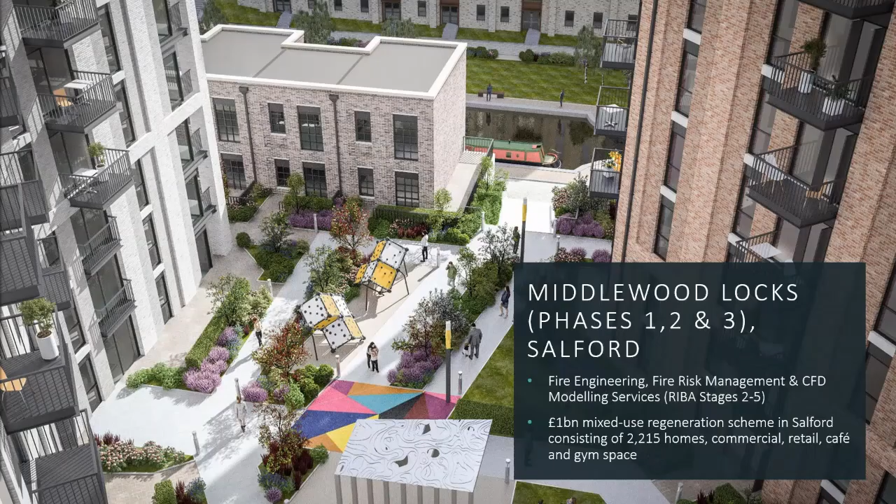Some of the work we do: Middlewood Locks. This project is a retrospective assessment of materials used in external walls on pre-existing buildings, and fire safety strategy development for ongoing design risks. Combining our fire engineers and fire risk managers, we provided a full spectrum fire engineering approach to this project.

Hunslet Road in Leeds, very dear to my heart. Our contribution stretched from site investigation to transport assessments to energy and sustainability statements. In July, the project was awarded project winner at the Housing Design Awards.

Siemens Train Factory. I often tell our clients we work on everything apart from rail. However, we are delivering a railway factory. This state-of-the-art rail facility will deliver new, lighter, more energy-efficient trains for the Piccadilly line in London Underground.

Hangar 86 is the first space in the new 517-acre site to be occupied by Dyson staff. This 100,000 square foot workspace includes a gallery, labs, and testing space.

University of West of England Engineering Building: we're delivering the state-of-the-art flagship teaching and research building. Hydrock secured planning permission and is now supporting construction through to completion.

Hydrock is providing fire engineering design for the University of Bath Institute for Advanced Automotive Propulsion Systems. This new global centre of excellence will deliver transformative research and development for automotive propulsion technologies, supporting the development of a new generation of low carbon vehicles. Our team is preparing the fire strategy for the building through to RIBA Stage 7.

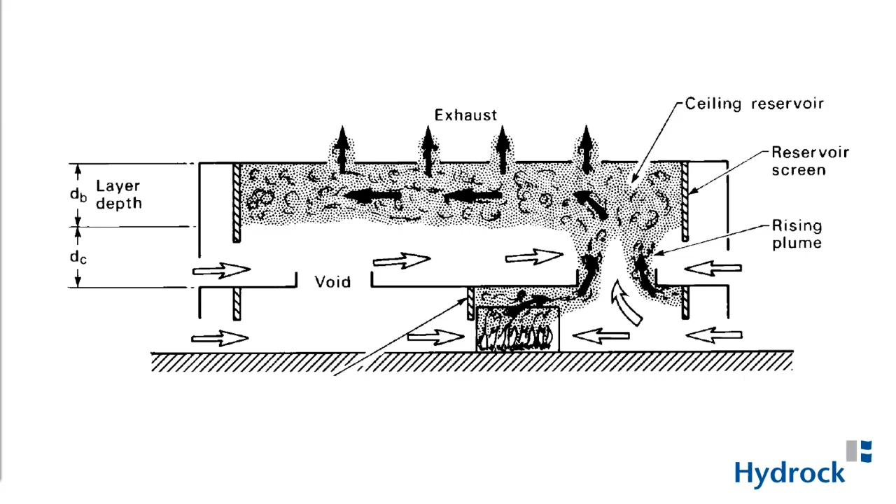Likewise, when I was living in the Middle East, the NFPA 285 test was mandated in the UAE Fire Code and the Saudi Building Code, all for new developments. I'm telling you this so you can appreciate that the impact of this disaster has been felt the world over, as the problem is the same the world over.

The Grenfell Tower fire was a disaster due to more than just combustible materials in the facade, however. The inquiry has highlighted that numerous fire doors were held open, or the closing mechanism was redundant. Fire doors have been replaced with non-tested fire doors, therefore not fire doors. Fire compartmentation had been breached with a recent gas main replacement and inadequately fire stopped. The lift did not operate as a firefighter access lift, and the smoke control system in the stair did not maintain the escape route free of smoke.

This example illustrates my previous point. If the intended design purpose of a system is not understood and appreciated, how can those who are expected to operate and maintain an adequate level of safety in a building make the right decisions?

After the Grenfell Tower fire, a panel of experts led by Dame Judith Hackitt was commissioned by the UK government. The aim was to carry out an independent review of building regulations and fire safety, and set up in July 2017. Note, the Grenfell fire happened on the 14th of June 2017. The interim report was published in December 2017 and the final report issued in May 2018, which is pretty rapid when you consider the context.

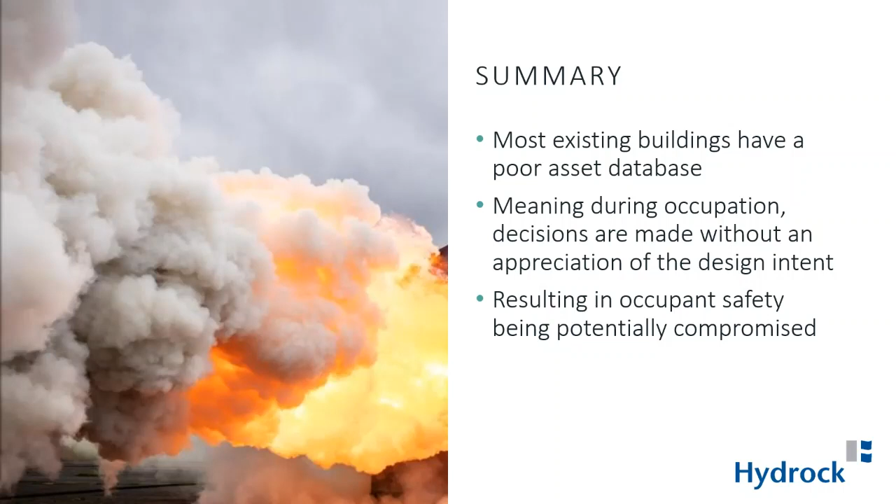Most existing buildings have a poor asset database, meaning during occupation, decisions can be made without an appreciation of the design intent, resulting in occupant safety being potentially compromised.

Under the new Building Safety Bill, there will now be an obligation to create a digital record for all high-rise residential buildings. This can be achieved by creating a golden thread of information throughout the design, build, and ongoing throughout the occupation of high-rise residential buildings.

Data will be captured during the initial design, through the build, and include any changes that occur throughout occupation. This package of building information will be used by the duty holders to demonstrate to the regulator that an adequate level of safety for the building can be maintained throughout its life cycle.

A draft Building Safety Bill was published in July 2020, which went before a parliamentary committee in August 2020. Here it was scrutinised by the Housing, Communities and Local Government Select Committee. The revised bill was published in February 21, and the Building Safety Act is anticipated 21-22 to be implemented in 2023. There's an expectation that a transition period will take place up to and including 2024.

Fundamental to the reforms being proposed by the Building Safety Bill is the way that the design, build and occupation of high-rise residential buildings will be regulated. The Health and Safety Executive has established a building safety regulator in England, headed up by Peter Baker, as Chief Inspector of Buildings. The Building Safety Regulator will have three main functions: overseeing the safety and performance of buildings, helping and encouraging the built environment industry and building control professionals to improve their competence, and leading implementation of the new regulatory framework for high-rise residential buildings.

The accountable person can be an individual, a partnership, or corporate body. However, there must be a nominated individual so that accountability can be held. The key duties that the accountable person holds under Section 84 of the Building Safety Bill: a requirement to register the building with the Building Safety Regulator. Before occupation, apply for a building assurance certificate, which must be displayed, and the building assurance certificate is expected to have the name of the accountable person and the building safety manager listed.

Appoint a building safety manager. Assessment of the building safety risks and management of the building safety risks. Create and operate a building safety case and create a building safety case report, which is expected to be every 5 years for submission to the building regulator. And also operate a resident engagement strategy. The focus of this talk is the golden thread. So we will be taking a look at how the accountable person can assess and manage building safety risk.

To make the application for the building assurance certificate, it's expected that the accountable person will need to issue the golden thread or the building safety case to the building safety regulator. After they have registered the building with the building safety regulator, the accountable person will need to provide information that as yet is not clearly defined.

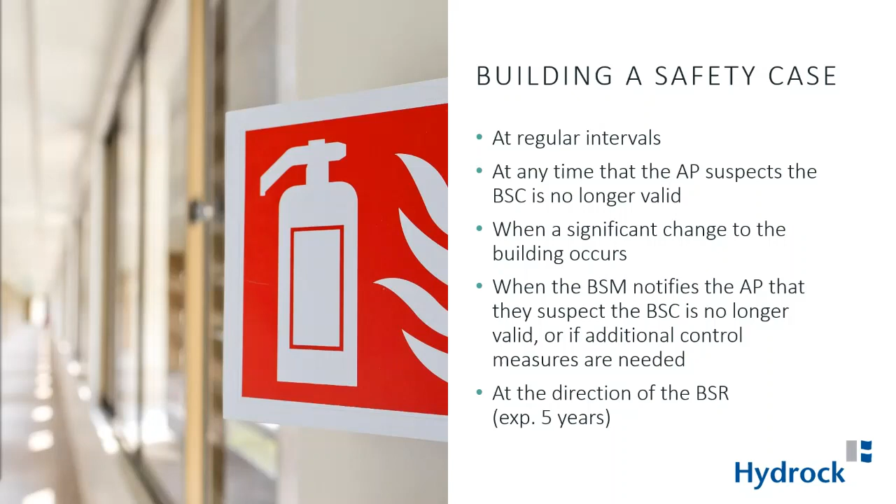The accountable person and their building safety manager will be responsible for assessing the building safety risks at regular intervals, at any time the accountable person suspects that the safety case is no longer valid, when a significant change to the building occurs, when the building safety manager notifies the accountable person that they suspect the safety case is no longer valid, or if additional control measures are needed, and at the direction of the building safety regulator. And again, that's expected every 5 years.

So fundamental to our understanding of the golden thread is the duty holder tasked with operating and maintaining the building safety case, the building safety manager. The building safety manager role will be multifaceted. Building safety extends much beyond fire safety. Structural safety, gas safety, mechanical, electrical, plumbing safety, Legionella, health and safety will all need to be overseen by the building safety manager. Meaning the role will, certainly in its infancy, be an oversight role, looking after the appointment of experts who will be delivering the safety reviews.

The building safety regulator will expect that the building safety case will be operated and maintained by the accountable person, who will then delegate to the building safety manager. Again, operated and maintained, as the building safety case will be a live document that will be continually updated as the building operates.

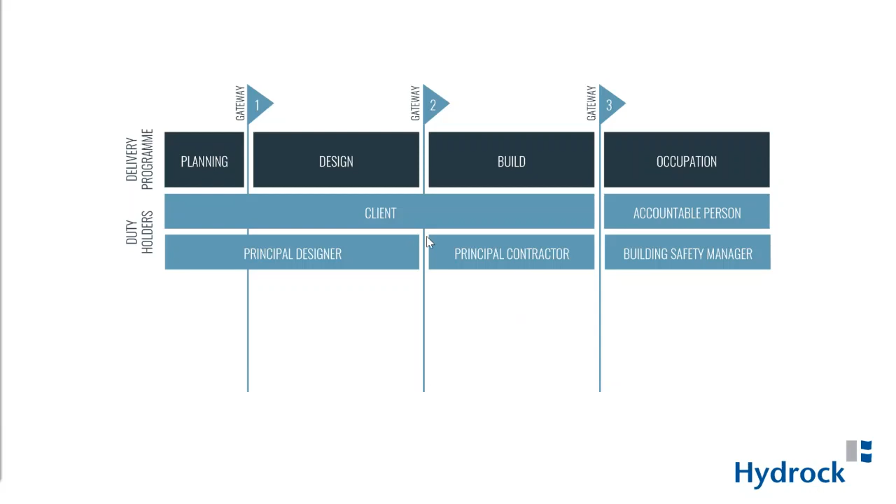Working in collaboration with our esteemed colleagues in the BIM Academy, we have taken a reverse view on what data will ultimately be required by the accountable person throughout the golden thread. Now that we have an appreciation of what will be needed by the building safety manager to operate and maintain a building safety case, we can identify what information will need to be captured through the design stage and the build stage.

Gateway 1. At this early stage, the content that the accountable person will need during occupation and in what format that asset information model operates will be defined by setting the brief. Key to this will be what information in what format will be expected to be collected during concept, scheme and detailed design stages. A suitably competent team will need to be appointed to collect this data, and an equally competent team will need to sit client side to validate this collection.

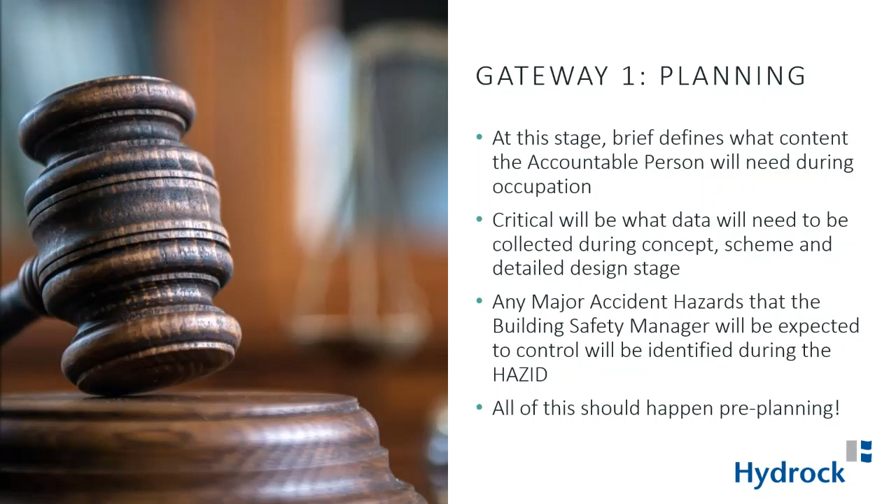The major accident hazards that the building safety manager will be expected to control will need to be identified during a HAZ-ID. All this should happen pre-planning, before the design has progressed, so that the principles for data capture can be agreed and set in motion.

Throughout all stages of the design, it's expected that the following will need to take place. Inputs into a separate BIM model will be generated and a dedicated platform created to capture data during the design. With the correct platform in place, this should be automated as the design is generated in BIM. This separate BIM model will be catered to align with the format of the asset information model being operated by the accountable person.

Dedicated building information modeling managers will validate the content being generated to ensure it meets with the brief, much like an itemized list of deliverables you'd see in a request for proposal. It's expected that this role will sit client side and act much like a periodic peer reviewer. The design program will need to account for this review period at each client approval point.

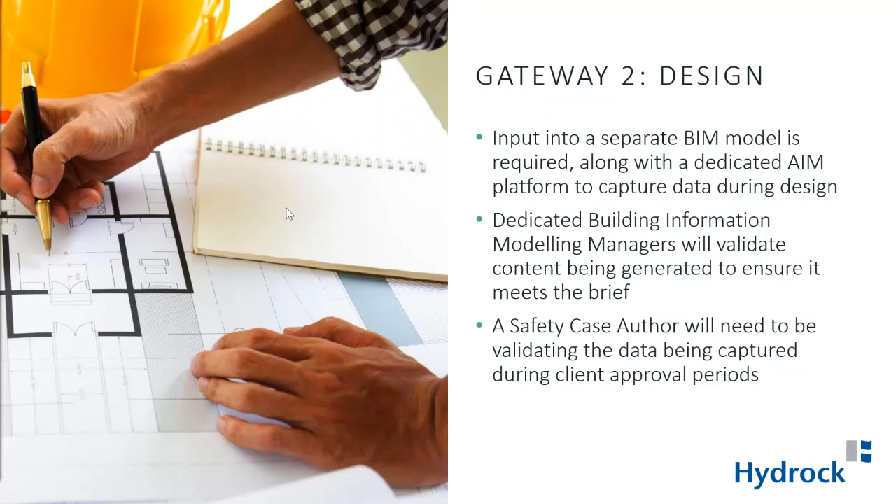Much like the BIM manager, it's expected that a safety case author will need to be validating the data being captured during client approval periods. Again, if the brief is correctly set during planning, an itemized data list should be made available to the design team, which then can be validated by the client representative, such as the building safety manager or a building safety case author. Whilst the capture of data during a design is nothing new, the creation of a dedicated BIM model, which aligns with the asset information model, will be a new design discipline.

Once the project design has been tendered and handed over to a contractor, the same principles of data collection will need to take place, but in a different manner. Much the same as during the design, input to the asset information model aligned BIM model will need to be continued throughout the build stage. The primary difference from the design stage, however, is the need to record installations on site and monitor what systems are actually being installed. It's expected that a dedicated clerk of works will be on site full-time to record and itemize the systems that will be operated and maintained in the building safety case.

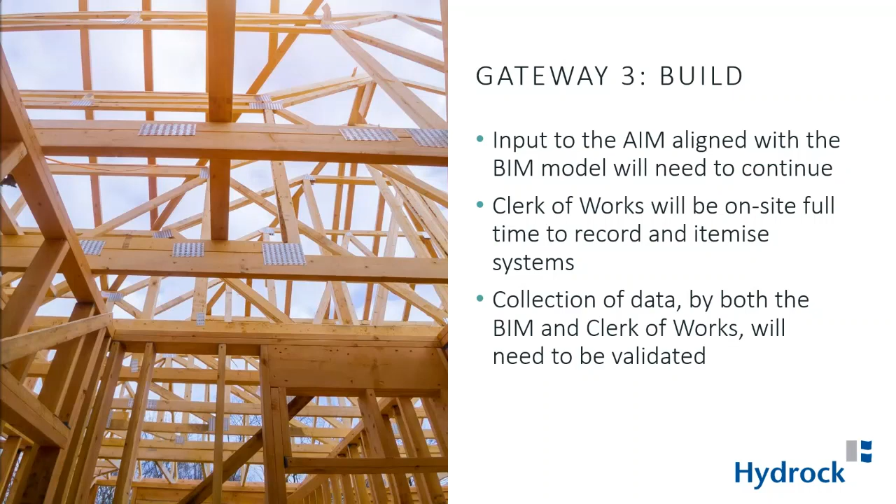As with the design stage, the collection of this data by both the BIM manager and the clerk of works will need to be validated. Now, this can either be a continuous oversight for larger, more complicated buildings, or periodically for less challenging sites. And this role is expected to sit client side. So now we have come full circle. By determining what the end user needs, as in the accountable person and the safety case content, we can define what data needs to be captured through the design stage and through the build stage.

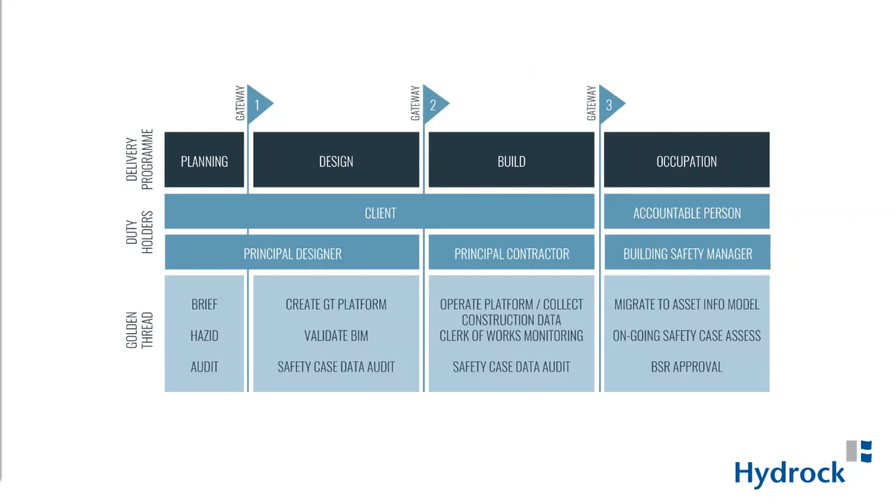So to summarize, the building safety case, or the golden thread, data will be migrated to the asset information model from the dedicated BIM model. By utilizing a digital golden thread, the building safety case will be able to be assessed continually throughout the life of the building as a live model. The regulator can request the latest up-to-date data whenever they choose and ratify the level of safety in the building.

At Gateway 3, the client then hands over the golden thread to the accountable person. With this, the accountable person applies for the building assessment certificate, and their appointed building safety manager operates and maintains the building safety case. I highly doubt that the current procurement methods used for high-rise residential building projects will remain unchanged. The cultural change put forward by Dame Judith Hackitt will no doubt see the inputs of the end user, the accountable person, at the very commencement of a development. Their obligations under the Building Safety Bill will push the accountable person to have a vested interest in ensuring that the data that they will be handed at the end of the build stage is accurate and contains the necessary detail to safely operate the building.

So there we have it. The need to operate and maintain a building safety case will result in a new discipline for all high-rise residential projects. The information that needs to be collected during design, build and occupation needs to align with the asset information model utilised by the accountable person. The client will be responsible for capturing this data, and it's highly likely that the accountable person and their building safety manager will be involved in determining what data needs to be captured pre-planning, if not throughout.